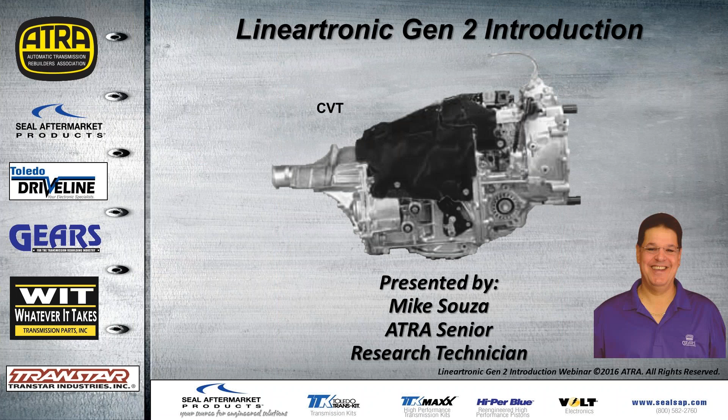Today's presentation, we're going to talk a little bit about the Lineartronic Gen 2 introduction. This is the smaller CVT version of the Gen 1. The Gen 2 is about 100 millimeters shorter, and it's about 15% lighter than the Gen 1. It's designed to fit into a smaller chassis behind the smaller engine vehicles. To identify the Gen 2, use the tag number located on the bell housing, also known as a TR580.

Power flow is a little bit different on the Gen 2. It goes through the input shaft, which has the forward clutch attached to it. On the Gen 1, we mentioned it had an input clutch with no friction plates, it was steel on steel. You won't find an input clutch on this transmission. It works strictly off the input shaft and forward clutch.

Now, the reverse clutch and planet are connected in front of the primary pulley. This means that the pulley's rotation changes between forward and reverse. Having the forward and reverse clutch in front of the pulley cuts down on any engine drag in neutral and park because the pulleys aren't rotating in those ranges. Now, all the weight and load of the vehicle directly affects the secondary pulley.

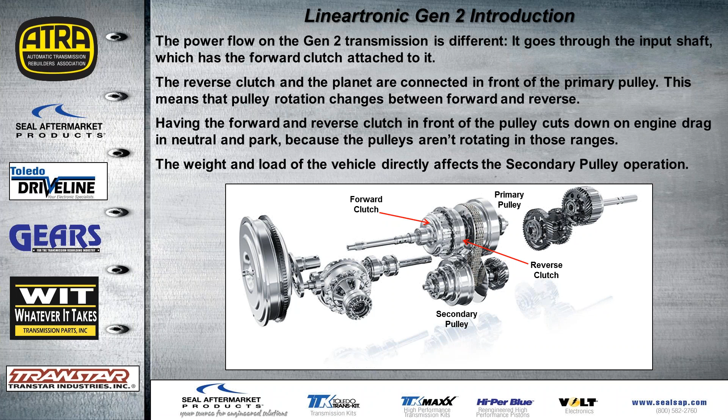The valve body on this unit is underneath the valve body cover on top of the transmission, completely different from the Gen 1. Now, the information on the Gen 2 CVT valve body is hard to find because it isn't published. Subaru does not make it available because they sell the valve body, not the individual components. If you need a solenoid or you find a worn out valve. There's no fix available at this time in the aftermarket, which means you'd have to replace the entire valve body from the manufacturer. At ATRA, we try to find ways to overcome these problems. We're publishing the information to make it easier for you to find the root cause of failure when you're rebuilding one of these units.

Now, removing the valve body with the transmission still in the car doesn't look easy because the valve body is on the top of the transmission. Subaru has a special cloth sheet for this procedure to cover the engine and keep dirt out of the transmission. Now, it's important that if you do remove this cover in the vehicle, you're going to want to clean off the cover and the area around it so that when we do pull the cover up, we're not going to get any debris into the trans.

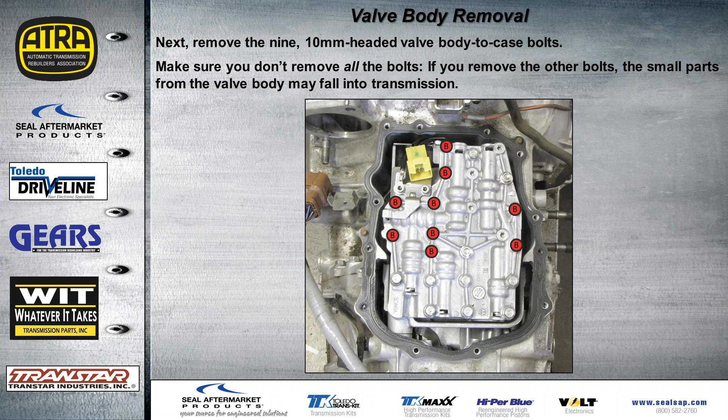Next, we're going to remove 9 10mm head valve body to case bolts. Make sure that you do not remove all the bolts. If you remove the other bolts, small parts from the valve body may fall down into the transmission.

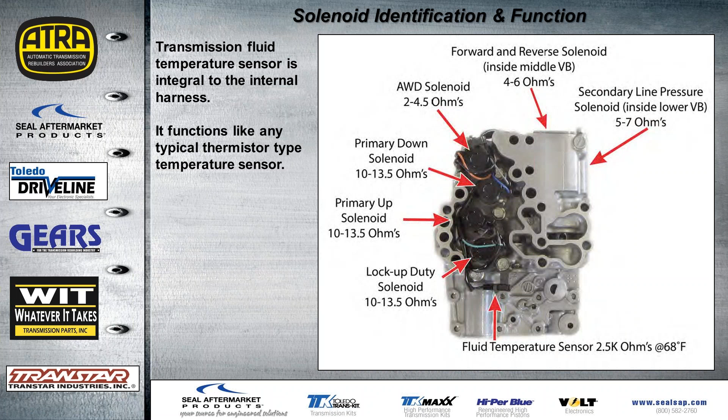Now, we have 4 solenoids that you can see here on the lower side of the valve body, but there's 2 others. Actually, one's located in the middle valve body, and there's one located inside the lower valve body. The one inside the middle valve body is the forward reverse solenoid, and then you have your secondary line pressure solenoid on the inside of the lower valve body, and we'll get to those in a moment.

We just wanted to show you this particular solenoid because it's unusual, just like the Gen 1, and that's the secondary line pressure control solenoid. It actually has the pressure regulator valve in the snout. This solenoid operates at about 2,000 hertz, and it controls an orifice with a needle and seat. The orifice controls the position of the pressure regulator valve, which obviously controls line pressure.

The solenoid measures around 5 to 7 ohms. It'll have a single red control wire going to the solenoid, but the solenoid itself is grounded through the valve body.

Now, for some of the other solenoids, we have the forward-reverse linear solenoid. Obviously, that's going to control the forward and reverse regulating valve. The manual valve directs the regulated oil from that valve to the forward and reverse clutch, depending on the position of the manual valve.

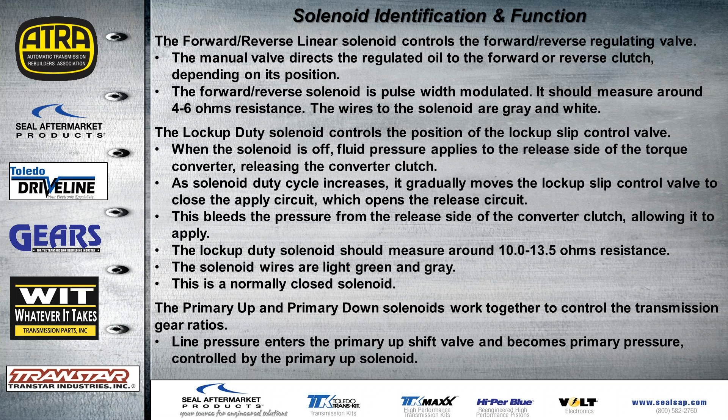This is the upper valve body. After you remove all the bolts on the lower side of the valve body, flip it over and remove the bolts from the upper section. Once we remove the upper section of the valve body, inspect the valves and the bores. Like I said, we don't have at this time aftermarket fixes for any worn valves, but if we're going to reuse the valve body, it's best to take these valves out and make sure there's no worn bores, so we know for sure we can go ahead and reuse the valve body.

In this section of the valve body is the primary down, primary up valve, forward reverse regulator, transfer case clutch slip control, and the torque converter pressure and fail-safe valve. We give you all the spring dimensions in your handout. Again, this information is not available from OE. This information was all compiled here at ATRA.

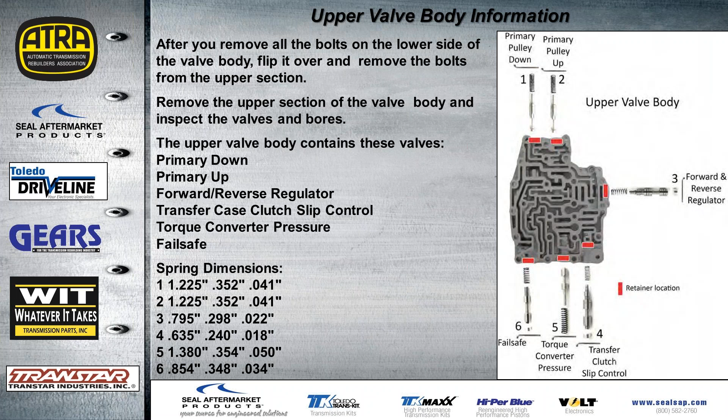Now for the middle valve body, look for some small filters and relief valves in the middle section. As you can see, we have 4 relief valves. Each spring is a different dimension, so we give you all the dimensions. The springs go down in the valve body first. The same with the 3 filters that are located inside this section, and the springs go down first on those also. So we have a pilot valve, forward reverse limit, primary relief, the lube drain back, and the torque converter clutch control and regulator valve.

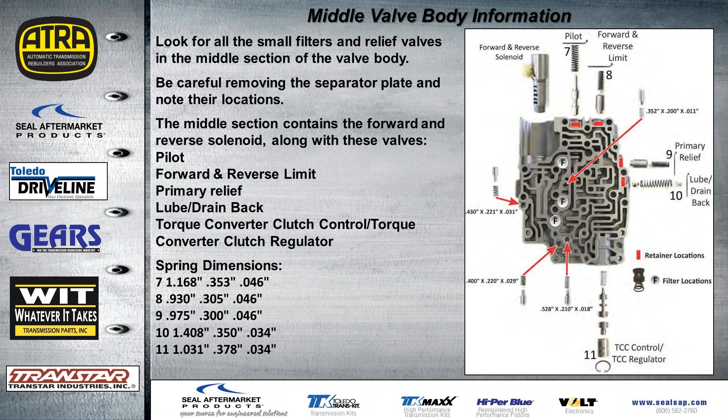The lower valve body section, this is where the secondary line pressure solenoid is located. You can see the solenoid through the side of the valve body here, but you still have to remove the 2 bolts and that plate to get the access to the bolts for that solenoid. The only valve found in this section is the lube check valve.

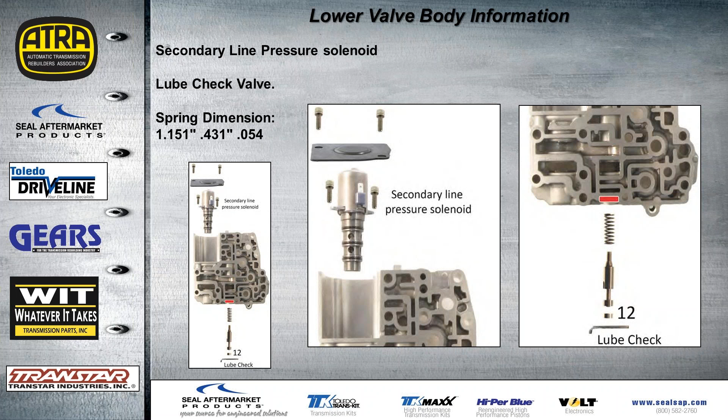Just like on the Gen 1, we have 2 bulkhead connectors on the top of the case. These connect the transmission harness to the transmission control module harness. The brown connector is the T3. It contains the inhibitor switch and speed sensor signals. And the gray connector is the T4, and that's for the transmission solenoids and the temp sensor signal.

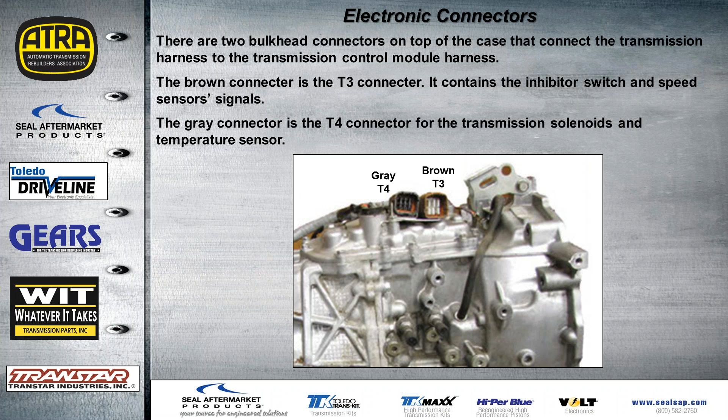Now the inhibitor switch is on the passenger or right side of the transmission. Now, obviously this switch inhibits the starter operation and operates the backup lights. It also tells the TCM what range the transmission has been placed into.

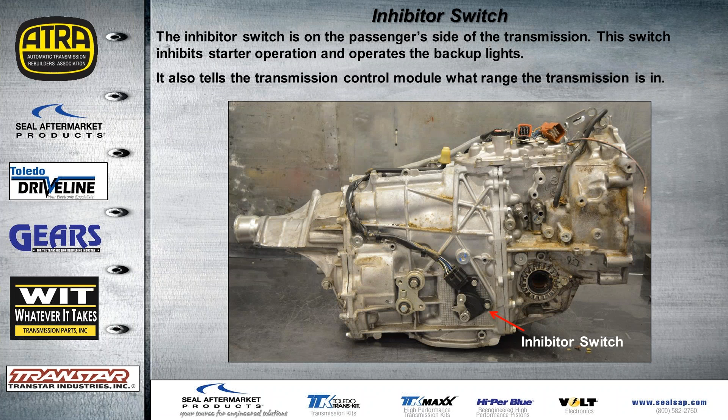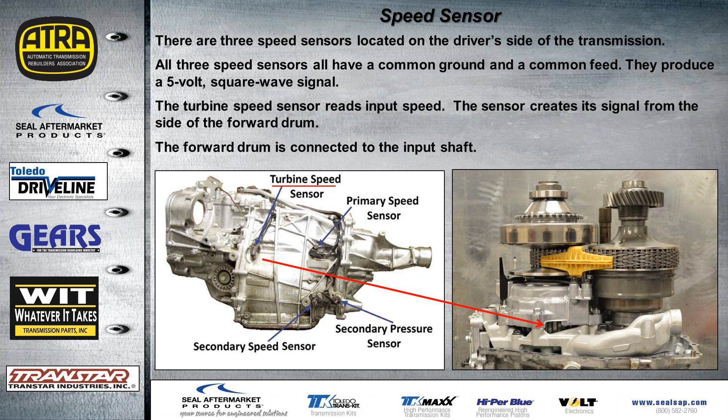Okay, there are 3 speed sensors located on the left side of the transmission. All 3 speed sensors have a common ground and a common feed. They produce a 5-volt square wave signal. The turbine speed sensor reads input speed. Now this sensor creates a signal from the side of the forward drum. Obviously the forward drum is connected to the input shaft. What we're showing you here on the lower right is that sensor is aligned with that opening that you see in that housing so that it can monitor the lugs on the forward drum as it turns.

Then we have the primary speed sensor that reads the speed of the primary pulley, and it creates its signal from the exciter ring that you see here attached to the primary pulley. This is something that we should take care with during assembly or when the parts are being cleaned. We do not want to bend any of the teeth on that exciter wheel.

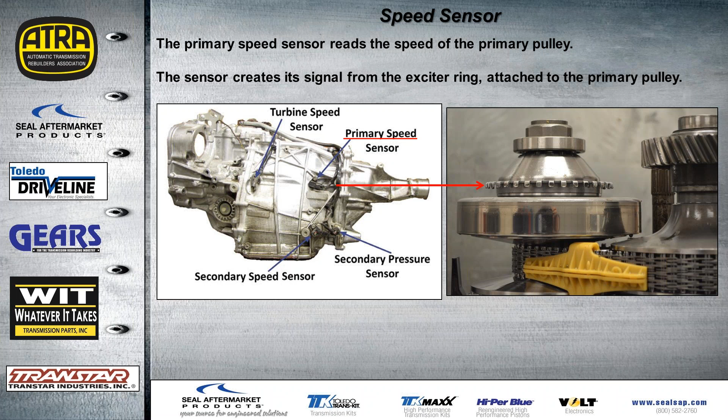Then that leaves us with the last speed sensor, the secondary speed sensor, and that monitors the secondary pulley. And the sensor pickup is the reduction gear itself that's splined onto the secondary pulley.

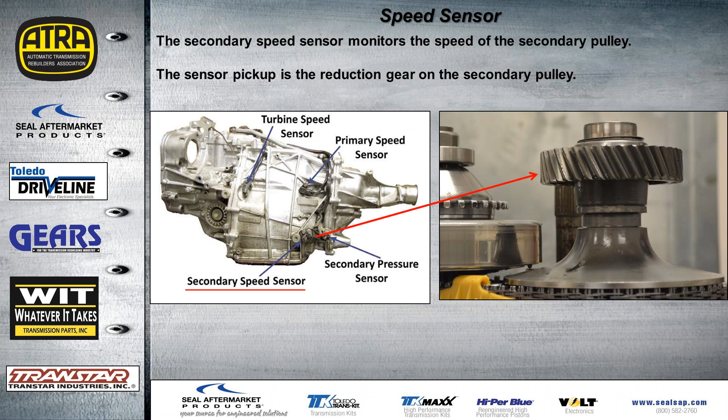And still on this left side of the transmission, we have the secondary pressure sensor. This measures the secondary pressure, or as we call it, the line pressure. This sensor has a 5-volt power source and ground, and the signal wire ranges from about 1/2 volt with no pressure and close to 5 volts, or approximately 4.5 volts, at maximum pressure.

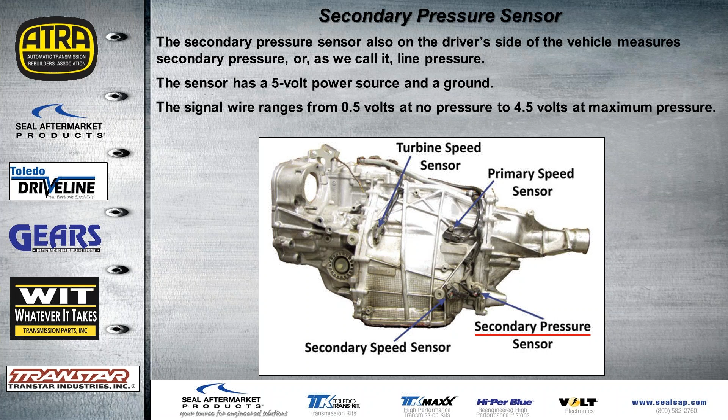When one of these units comes in with a problem, always start by checking the fluid level. After that, you need to make sure that the secondary pressure or line pressure is correct, and the secondary pressure port is on the left side of the transmission, just under the secondary pressure sensor. This is where we have to be cautious. This transmission develops extremely high pressures. You need a special gauge and hose rated at least 1,000 psi. Now, for safety purposes, you can use a pressure transducer instead of an actual standard gauge.

When running pressure tests, compare the pressure readings from your scan tool to the actual gauge pressure. Now, if the pressures aren't close, make sure you check the power and grounds to the secondary pressure sensors. They are known to fail, and if all the voltage levels are correct, then go ahead and replace the sensor. But the information that you see in your scan tool or software is going to be information that the TCM is getting from that pressure sensor.

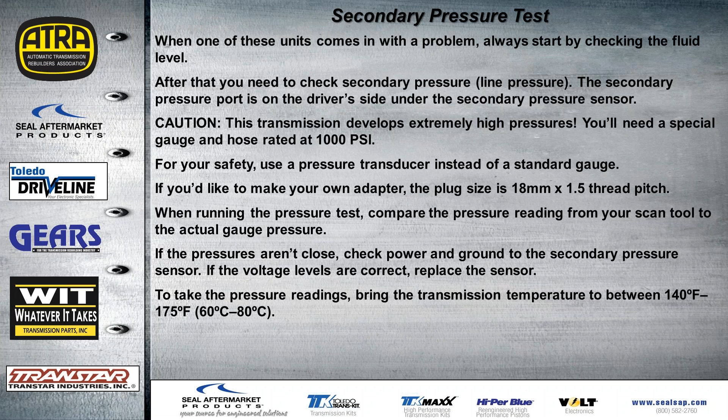Now, to take pressure readings, bring the transmission temperature up to at least 140 to 175, and then check your pressure readings at that point. In park and neutral, with the throttle closed at idle, pressures should be between no less than 72 up to 218 psi. In drive or reverse at stall, pressure should be no less than 652 to as much as 870 psi. And you can see here, this is where our pressure port is for the secondary pressure, and there's our transducer right there, or our pressure sensor.

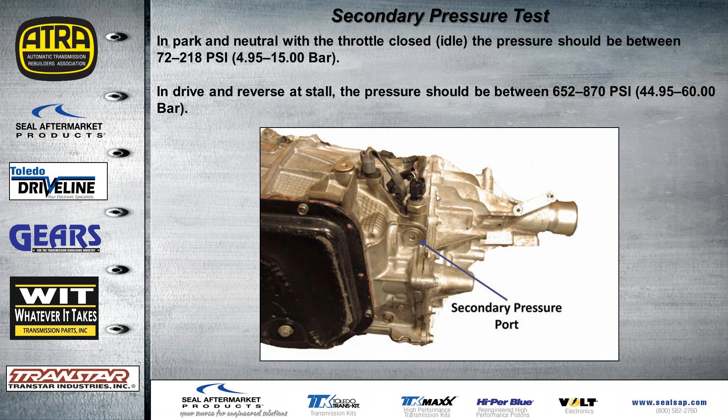Now, as far as transfer case pressure test, if the transfer case clutches chatter on turns, which is something not unusual to us working on Subarus in the past, and basically this one is the same way, even though it's a CVT. If it does chatter on turns and there's no power at the rear wheels, check pressure at the transfer case clutch pressure port.

Remove the plug. It has an 8mm Allen head. We give you the part numbers if you want to get the OE pressure gauge setup. There's 2 adapters, one for hose A and B, and there's also a pressure gauge adapter and a pressure gauge assembly. So you have all the OE part numbers for that if you do want to get those from Subaru. If you'd like to make your own adapter, the plug is 13mm with a 1.5 thread pitch.

Now, some models may have a front-wheel drive test mode for use with the scan tool. Obviously, we will need a capable scan tool or software on some of these models to be able to use this. So when it's in the front-wheel drive test mode, just like previous Subarus, the transfer pressure should be 0 at all times.

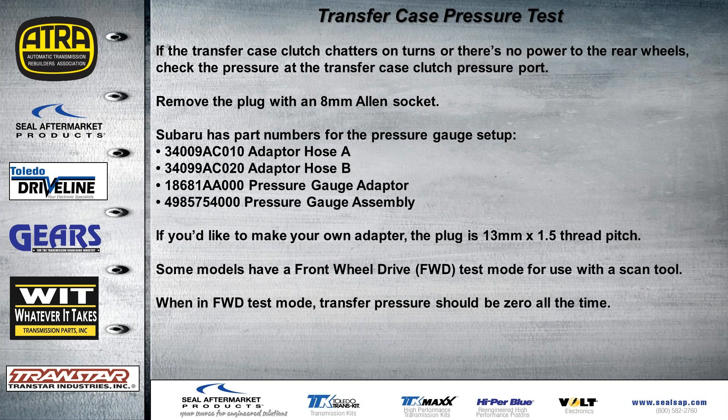So if the transfer case clutch pressure is at 0, the duty cycle should be at 0 also. When the transfer case clutch solenoid duty cycle starts to increase or rise, pressure should also increase with it. There should be no delay between the two. So as soon as you see the percentage go up on the solenoid, you should see the pressure rise on the gauge at the same time.

So at approximately 60% duty cycle, you should have no less than 58 psi to as high as 102. And then at almost max, 95 to 100% duty cycle, we should have no less than 145 psi to as much as 174. Again, like I mentioned before, when in park and neutral, you should have zero pressure at closed throttle. And you can see right here at the top of the extension housing on the left side is where the transfer case clutch pressure port is located.

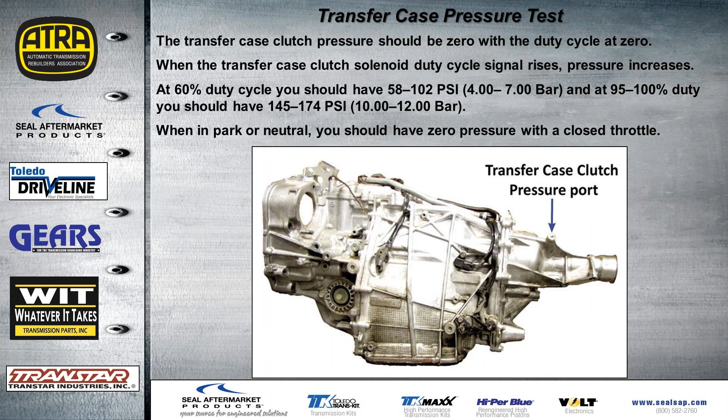Now, unlike the Gen 1, there are only 3 sections to the Gen 2 models. You have the torque converter differential housing, the main case, and the extension housing. The difference with the Gen 1 is in between the main case and the extension housing was a smaller intermediate case.

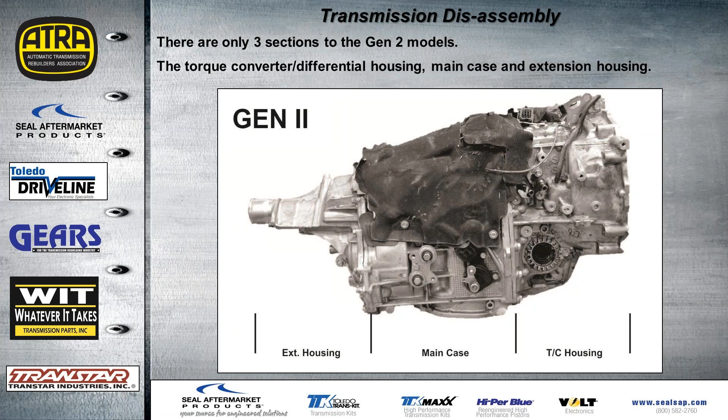Just like the Gen 1, we started at the back of the transmission to get to the transfer clutch assembly, which is located here at the rear of the trans. Simply remove the tail housing. Unlike the Gen 1, there's no hidden bolts here. We just remove the extension housing and you can get access to the transfer clutch and the drive gears in the back. One thing we want to mention is that there is an O-ring on the back of the case. We want to make sure that we don't mislocate that and that it does get replaced during overhaul.

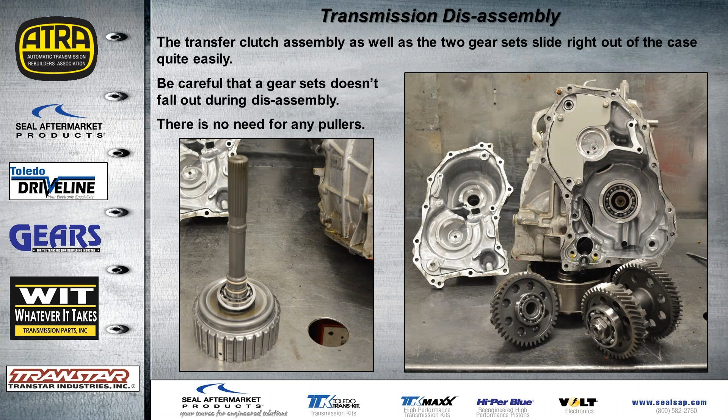Now the transfer clutch assembly as well as the 2 gear sets slide right out of the case very, very easily. Be careful with the gear sets that they don't fall out during disassembly and cause any injuries. There's no need for any pullers in this section. Now there's shims that go between the bearing on the transfer clutch assembly and the park gear. Make sure that these don't get lost and they're put back in the same locations that they come from.

There's also 2 plastic step sealing rings on the bottom of the transfer clutch shaft. As you can see in the photo, these rings are scalloped. One of the things that we really have to pay attention to is not so much an issue with the rings. If they're good and you want to reuse them, that's fine. They should be bore fitted in the section where they go to make sure they fit good and tight.

But the important part is the actual ring grooves. What we've seen is we'll have the original rings sitting here and they'll air check better than brand new OE rings. And in most cases, what we find is there's actual damage to the ring groove. And of course, the original ring is worn into that groove, so it'll seem to air check better. If there's any damage to the grooves, then the shaft or the drum should be replaced.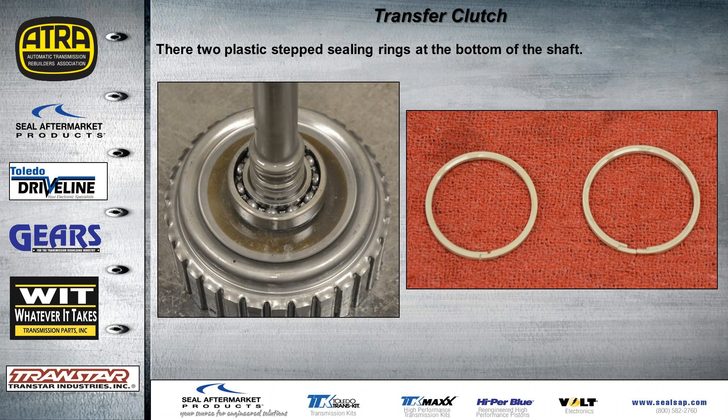Okay, this is the transfer clutch drum. Looking inside here, we have 4 clutches. We have 1 molded rubber apply piston and a molded rubber balance piston. Obviously, this is a turning clutch, so we need a balance piston for that. There's no bevel plates in here, just flat steels and pressure plate.

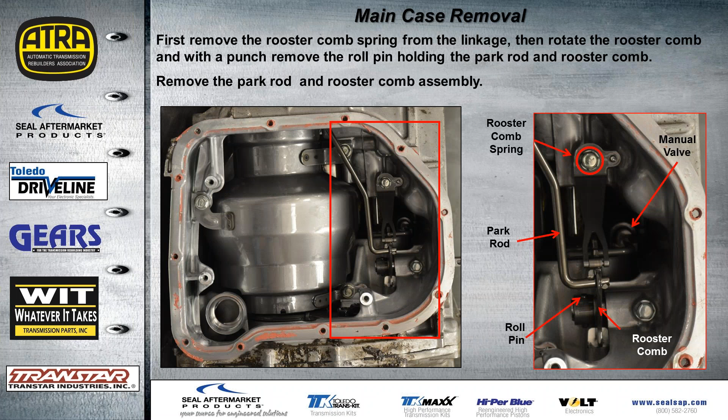Next thing we need to do is remove the main case. And what we're going to do first is remove the rooster comb spring from the linkage. And then with that out of the way, we can rotate the rooster comb, and with a punch we can remove the roll pin that holds the parking rod and rooster comb to the manual shaft, or to the main shaft coming through the case. Now the shaft doesn't have to be removed, just the rooster comb spring and the main rooster comb and park rod.

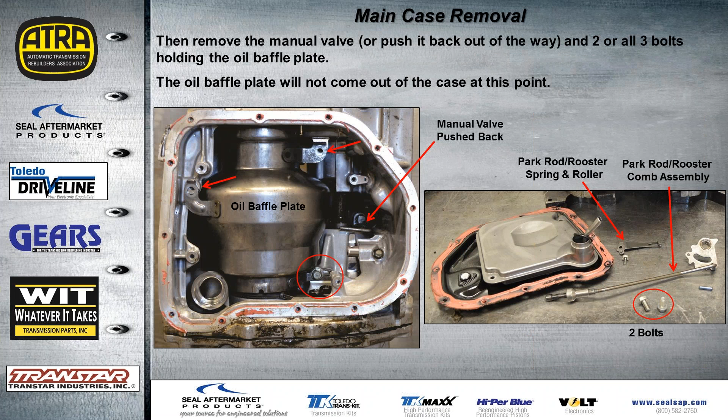Now, the next step, the factory manual recommends removing all 3 of the bolts you see here holding the baffle plate. This baffle plate does not come out through this opening in the case. It actually stays with the pulley as we remove the main case. So I kind of left the bottom right bolt not snug, just hand tight, so that I did have some looseness between the baffle plate and the case here. I didn't like the way it was flopping around with all 3 bolts removed, so I left 1 in there just barely hand tight.

Now you can either remove the manual valve or push it back out of the way. Again, it's up to you. I found it easier to only remove 2 of the 3 bolts for the baffle plate. So as you can see here on the right, we have our filter and pan off. Rooster comb, spring, and roller has been removed. Our rooster comb and park rod, and then obviously the pin that goes to the shaft, but the shaft can still stay inside the case.

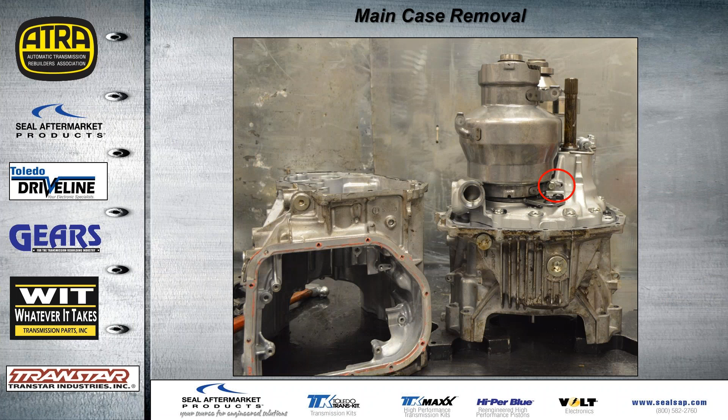Now, as you see with the main case removed from the front case, by leaving that 1 bolt there, this didn't fall out of place, it kind of just stayed there. We didn't have to worry about that. I found it much easier to work with it that way.

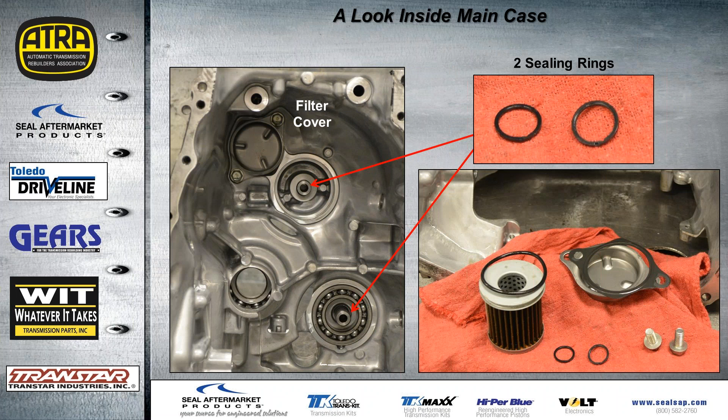Let's take a look inside the main case. As you can see, we have our pulley sections and the rest of the clutch assembly still on the front case. And we're going to take a closer look inside. And there's 2 more sealing rings we have to look at. There's 1 in each location here, as well as a filter cover. And it has a gasket underneath that cover, and there's also an O-ring on the lube filter that has to be changed. This filter should also be changed, as well as the sealing rings during overhaul.

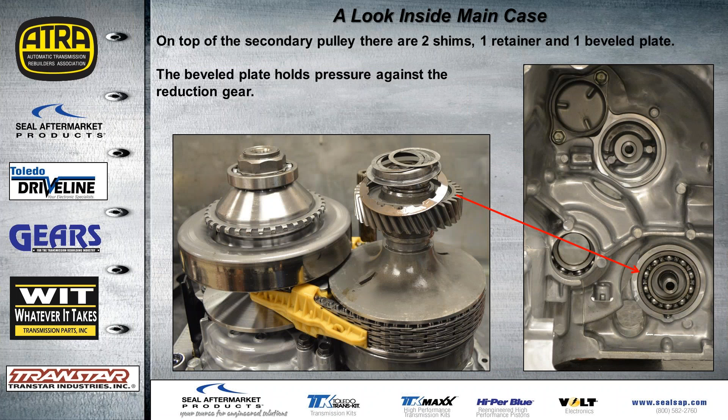Now, with the case out of the way, on top of the secondary pulley there are 2 shims, 1 retainer, and a bevel plate. The bevel plate actually holds pressure against the reduction gear. Even though this reduction gear is splined to the secondary pulley, it does slide right off. So since the speed sensor is looking at that gear, the only thing that this bevel plate could be doing is just preventing any vibration from that gear. There's a little bit closer look at the shims and retainer, and as you can see, the gear simply slides right off by hand.

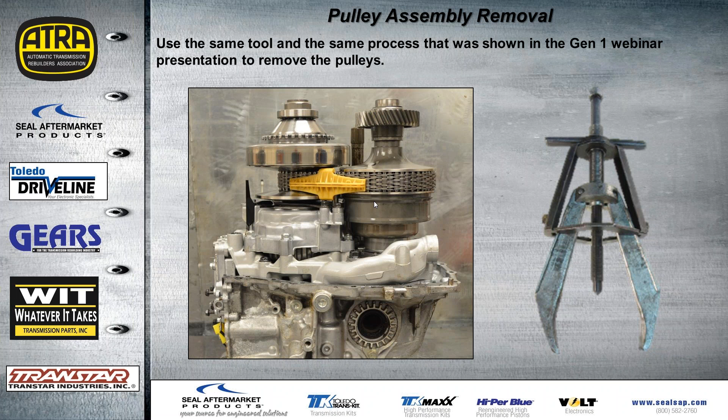Going back was a lot more difficult. Obviously with the chain and everything on there, you kind of had to try to shimmy everything back in place and put the bolts back on once the pulleys were down on the front case.

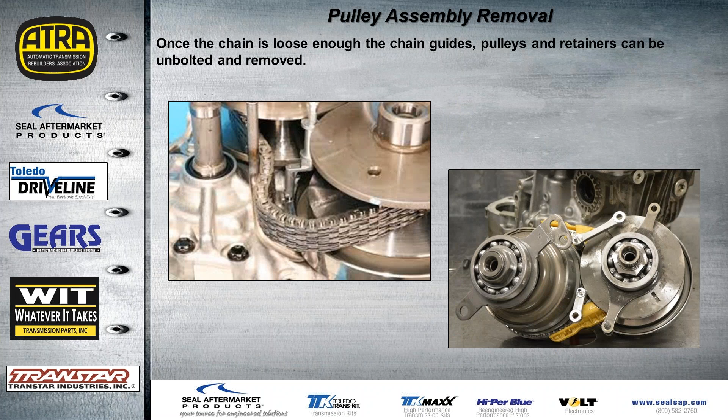Very similar to the Gen 1, just the primary pulley. As you can see, we have a couple of seals here. They should be changed during overhaul. Even if you didn't have a kit for this, you would at least want to pull the pulleys apart to clean any debris out of them, and also to make sure the seals are okay and there's no damage, so that we could just go ahead and reuse the pulleys.

Same thing with the secondary pulley assembly. There's the large spring that we were talking about earlier, and we obviously have a couple of seals here. We have a sealing ring here, and we also have a D-ring that goes onto that piston there.

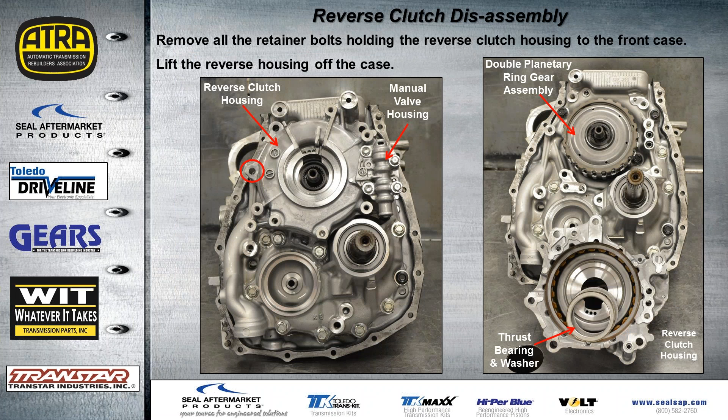Okay, with the pulleys and everything out of the way, the only thing that's left on the front case now is the reverse clutch housing and also the manual valve housing. We're going to go ahead and take all the bolts out of the reverse clutch housing, and you can see here on the right-hand side that we just lifted it up, flipped it over, and you can see there's another thrust bearing and a washer that goes there. The way you see it here in the photo is the way it goes back. That's the direction of the bearing and the location of the washer when it goes back.

The only thing that's left now is the double planetary and rear ring gear assembly that I was showing you in the upper right photo. Now, what we did next was we removed the 4 retaining bolts holding the manual valve housing to the reverse clutch housing. We did this just to show you that there's really no small parts or check balls or anything underneath it. There's just one plate, there's no gaskets. So we're just taking that apart and putting it off to the side to clean it up.

Now we started to disassemble the reverse clutch assembly. We had 4 clutches and steels along with 1 beveled plate. Now there's only 1 molded apply piston here, no balance piston. Obviously this is not a rotating clutch. It's just a brake clutch.

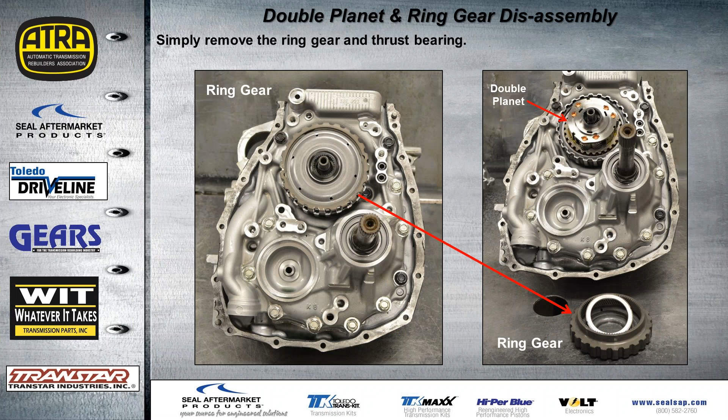So now that takes us to the forward clutch assembly. Again, very simple, lift it right out of the case. Not a problem, slides right out. And what we found here is this 1 small sealing ring on the rear side of the forward drum shaft. Then there were 2 larger sealing rings. There's 1 thrust bearing. Now if the input shaft was facing straight up, that bearing would be lifted like you see it on the bench and just placed right onto the drum.

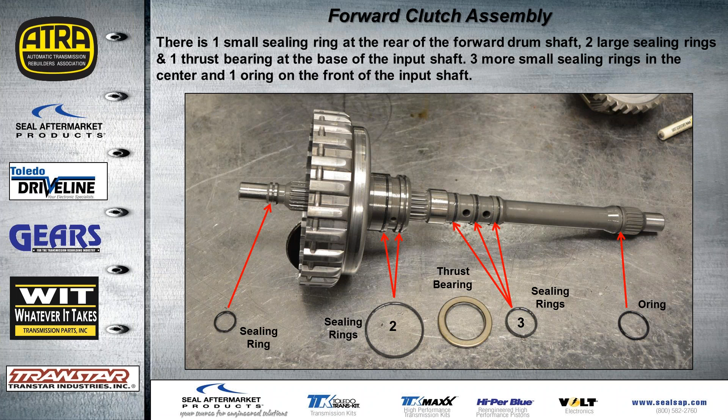There's 3 more smaller sealing rings on the input shaft, and then 1 O-ring in the front of the input shaft. Obviously that's for sealing the converter clutch circuit. Only 3 clutches and steel plates, 1 bevel plate inside the forward drum. Of course now this is a rotating clutch, so we have 1 molded apply and balance piston here.

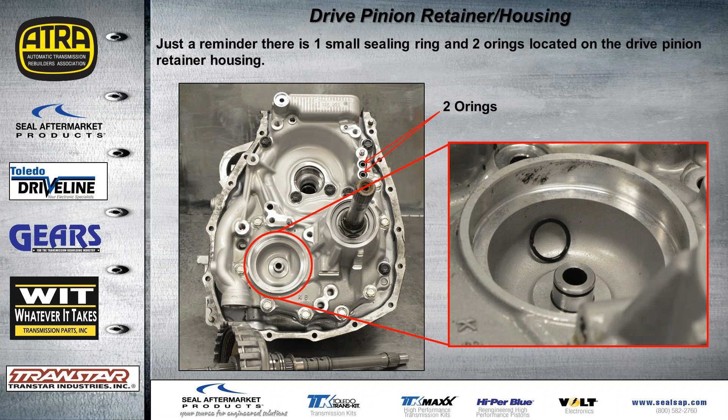Okay, just a reminder also that there is 1 small sealing ring we're showing you here on the right, and then there's 2 more O-rings to seal pressure on the front case. After removing all the bolts from the drive pinion retainer housing, we lifted that off the front case and flipped it over on the right. You can see the pinion gear.

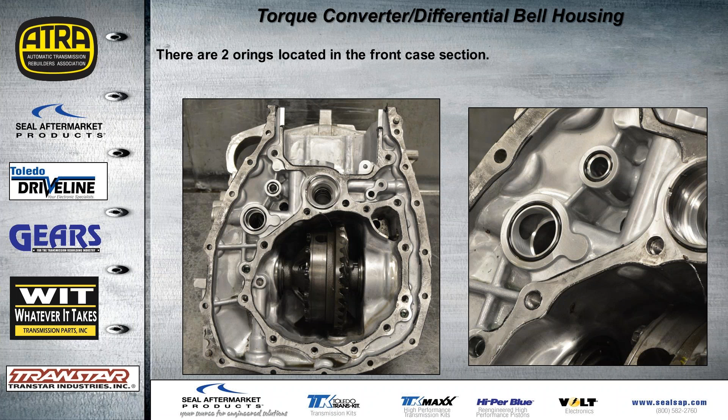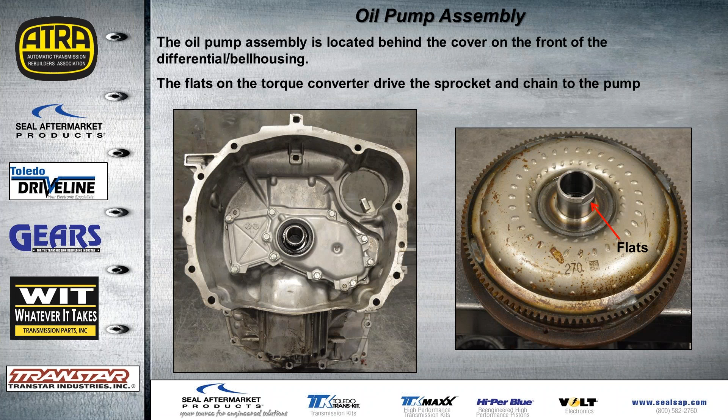And now that takes us to the rear side of the converter differential bell housing. And there's our ring gear. We also have 2 more O-rings in this section. Make sure that we don't mislocate them and replace them during overhaul. Now we can swing the bell housing around to look at the front side. As you can see here on the right, the flats on the torque converter are what's going to turn the drive sprocket, because this still is a chain-driven pump.

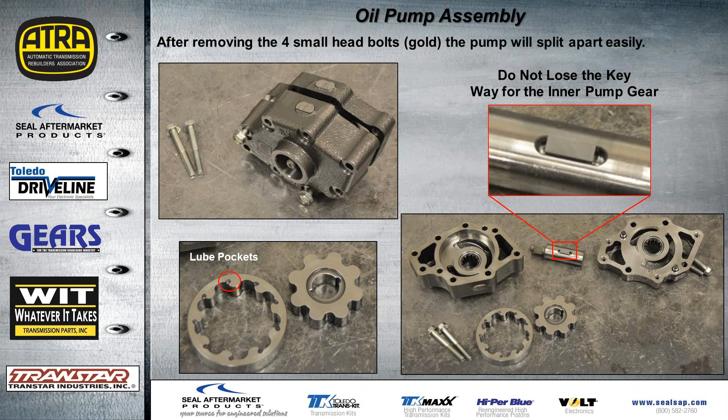Now we remove these small gold-colored bolts, and we can split the pump apart. It came apart pretty easily. You can see the outer gear in the bottom left has some lube pockets in it. And we want to make sure we don't lose the keyway for the inner pump gear. That's the pump completely disassembled there on the right. The way you see the gears, even if they look the same on both sides, I always like to make sure I put them back the same way they came out. So when I remove something, I always lay it on the bench facing the way it would go back.

One of the questions was, is it common for the pinion and differential ring gear to be burnt out on these? Yes, that is one of the most common problems. I was going to get to that in a moment.

Like I just mentioned, the main reason most of these transmissions show up in the shops is because they've been to one of these quick lube centers and had the service done, where they'll put it up on the lift, pull all the drain plugs out, put them all back in, and then not fill the front differential.

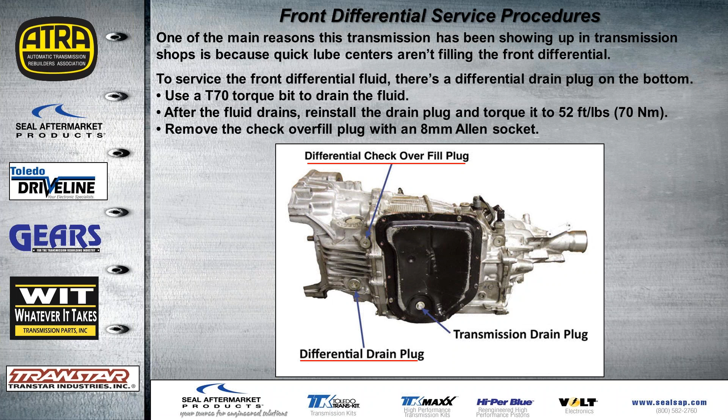Now, to service the front diff, there's a differential drain plug on the bottom. It uses a T70 torque bit. After the fluid's drained, we want to reinstall that plug, torque it down to about 52 foot-pounds, and then remove the check overfill plug. That's an 8mm Allen.

Once we remove the fill plug - this is the fill plug on the right-hand side of the trans, right by the axle, and this is why it's overlooked. With the axle in there, it's still accessible, but it always gets overlooked at a lot of the quick lube places. That's an 8mm Allen socket for that also.

The differential takes regular 75-90 gear oil. We're going to fill it through that hole until it starts to drip out through the check level plug. It only requires 1.43 quarts for a dry fill on the front diff.

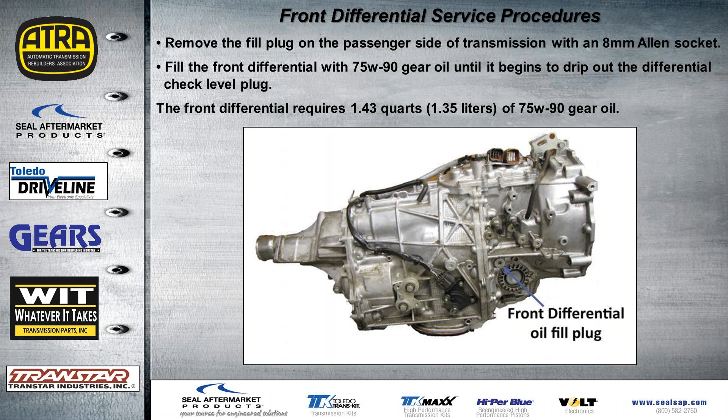I suggest you use the CVTF fluid from Subaru. Total dry fill would be about 13.1 quarts.